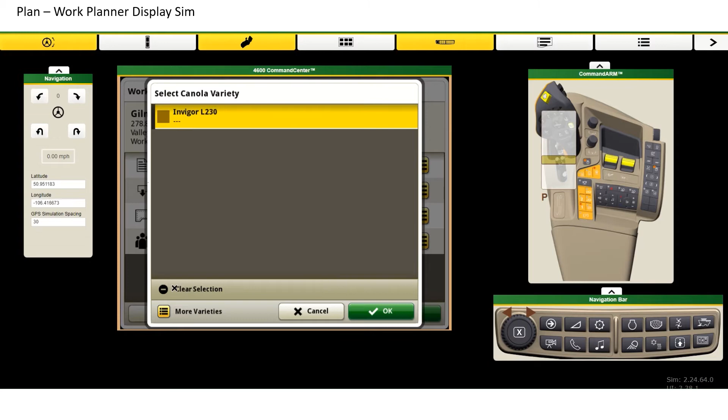If something changes before the day that you are actually going to be harvesting or planning any other operations, you can also edit these as you're entering the field. So let's say you run out of a certain variety and you want to change it to another variety that you'll be using on that day. Here you can select that, clear that selection, and select another variety instead. Here we have 233P as one of our other options. You can add another variety from scratch too if you'd like to enter it into the display like you normally would.

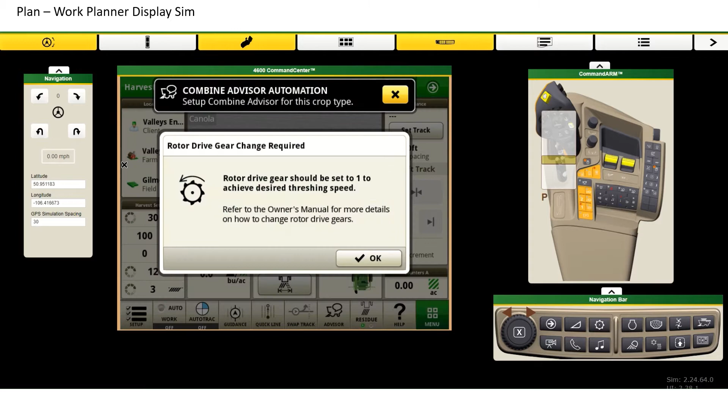You can also add in your operator name here from your list of operators or add a new operator as well. Once you start harvesting and hit OK, this is going to change your client, farm, and field here to that information that you'd saved previously. This will show up again as you exit and enter the field, and it will resume your work as well automatically. It'll give you the option if you'd like to start new work, you can do that as well.

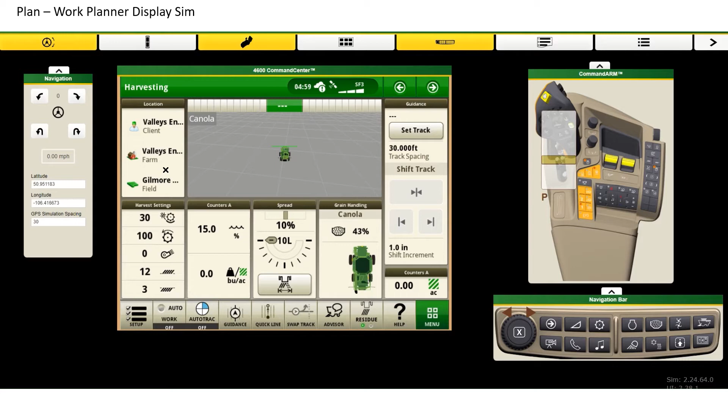The next tab that we're going to go over is the Analyze tab. In this tab, you're going to be able to analyze and report on your completed work across multiple fields through your Analyze tab itself. Through Field Analyzer, you're going to be looking at your completed work, as well as Field Analyzer Beta, which is the newest version. What we'll go through is going to analyze your field side by side and the yields on your field too.

Machine Analyzer is going to analyze your equipment across your fleet, as well as Machine Reports can generate reports based off of your fuel utilization and maintenance. We're going to go into Field Analyzer here first.

When we get into our Analyze tab here, you can see that there is Field Analyzer and there's Field Analyzer Beta. The difference between these two is Field Analyzer is our original analysis tool to look at your field's yields as well as other components and compare them across the field. Field Analyzer Beta is our newest version of this tool. The only reason that we have the beta version on there is because we are continuously adding new features and working on this model to make it better every day.

I'm going to start with Field Analyzer itself here and just give you an overview of what the Field Analyzer tool looks like. When you select the tool, you're going to have the option at the top here to select your field. Here, I'm going to select the field that I'm looking for, and then it's going to show your most recent application that's been done on that field. In this case, it was an application. I'm going to select our wheat durum harvest from 2020 to give you guys an example.

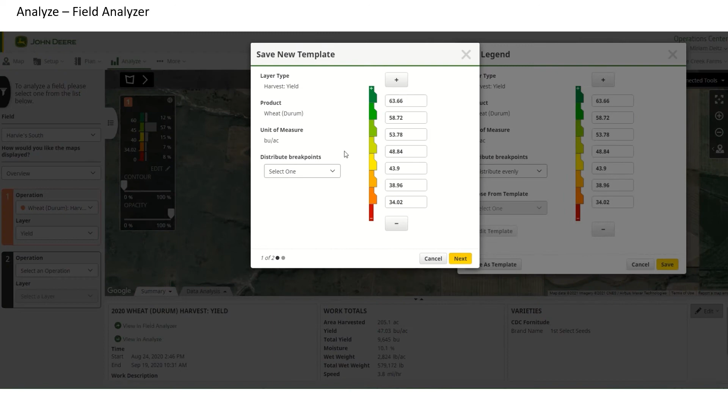So if you have multiple fields, let's say you have two different fields that you have durum on, and you want to use the same legend to put them side by side and compare their yields, you can save that legend as a template, select the breakpoints of it, hit next, name this, hit save, and that's going to be a template that you can choose from. Now it's in this drop-down list so that when you go to select it next time, it's going to be very easy to do. So when I hit save here, it's going to readjust the legend that's being used on this map.

Once this legend is saved, it's going to adjust that map accordingly to the colors that are on that map as well. You can see that we're going to be seeing that same area in the center of the field that's showing the variation in yield. However, with the Field Analyzer Beta option, we can break it down into a specific area and analyze just that. You'll notice that instead of on the left side, where the agronomic data was listed before, it's actually shown below here, where we can see the dates as well as your work totals and your varieties below.

When I select a specific area of the field, let's say this strip right here where we're noticing a lower yield, it's going to isolate that and just look at that data. This is going to load down below and showcase exactly what you're seeing in this area in a comparison to the overall field totals too. So we can see here that when we have our selected versus our full operation, we can compare a side-by-side of what that yield looked like compared to our total bushels per acre.

In this area, compared to our average bushels an acre, it's only 1 bushel an acre lower than the average, although this average does include these edges around sloughs as well. We can see that the moisture was about 0.4% higher, and our wet weight was a little bit lower as well. If we want to remember this and see this total, so we have our 46 bushels an acre, we can compare it without looking at these areas that we had in sloughs as well, if we want to just move this selected area over to another region of the field.

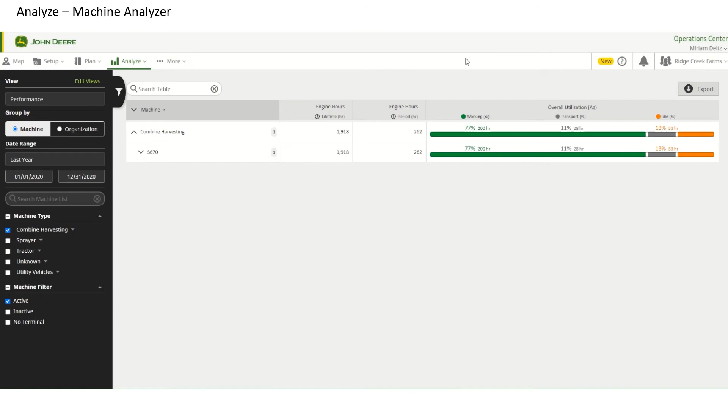So I'm going to start with a bit of a Combine Advisor package overview here. There are kind of three portions that come with our Combine Advisor package. There is our set portion, as well as our optimize portion and our automate, which is the primary part of the package. So with set, that is where you set your harvest setup. With optimize, that's where you're going to be looking at VisionTrack and optimizing your performance. And through automation is where you're going to be looking at Harvest Smart, Active Terrain Adjustment, Active Vision cameras, as well as your Auto Maintain.

When we look a little bit about the journey and the history here of where harvest automation has come from, we can start by looking at 2003 here, where we had our combine adjustment guides, where you'd walk through and it'd have recommended settings for different conditions. Then in 2013, the GoHarvest app was introduced as our digital interactive app that would recommend adjustments as well. That was for setting your combine manually.

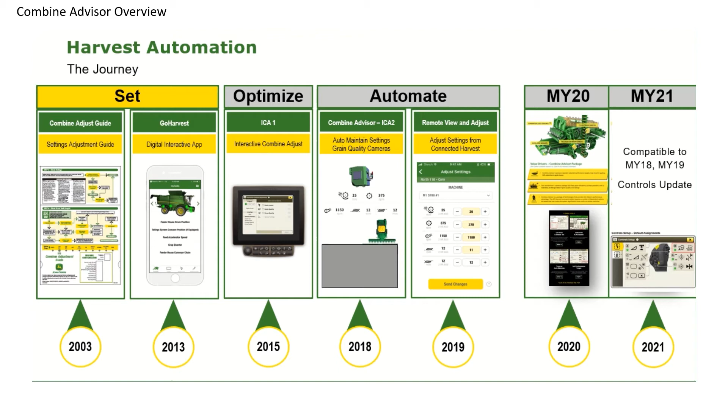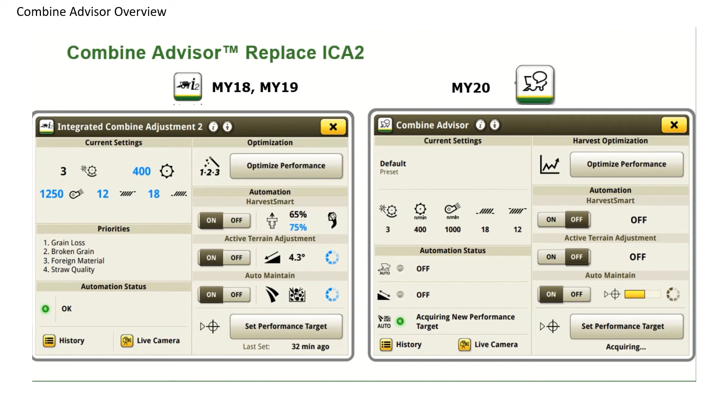There are a couple other things that have been changed. These priorities have changed now through our optimized performance function, and that's something I'm going to show you next. So when we select optimized performance, previously you'd see these areas to improve. That would be your grain losses, your grain quality, your straw quality, and excess tailings. You were able to set these as a priority, which one you'd like to set as your highest priority, and so on.

The challenge with this is that it would only consider between these two priorities, and then there could be some conflicting priorities in between the rest. So as you were looking at grain loss, your second priority would be broken grain, but as your conditions change, that wouldn't vary as much and you'd have to select your new tabs.

This optimized performance function now allows you to go into these individual performance issues. So separator losses, shoe losses, unthreshed losses, as well as broken grain, light material and foreign material, unthreshed material, straw quality, and excess tailings. As you select one of these, it's going to give you the options of mild, medium, or of a moderate issue, and you're going to be able to choose what you'd see this issue as. Then it will give you recommended solutions on the right side.

The other large change that we saw from previous years to our model year 20 is the Harvest Smart logic. So this logic changed from being a target pressure to now an engine power target. You can see that here on the previous model year 18 and 19 settings, you have your target pressure from a min to a max, and you're going to that to set where you'd like your rotor pressure to be. Here on the right side is what our new format looks like. This is a percentage of your engine power instead.

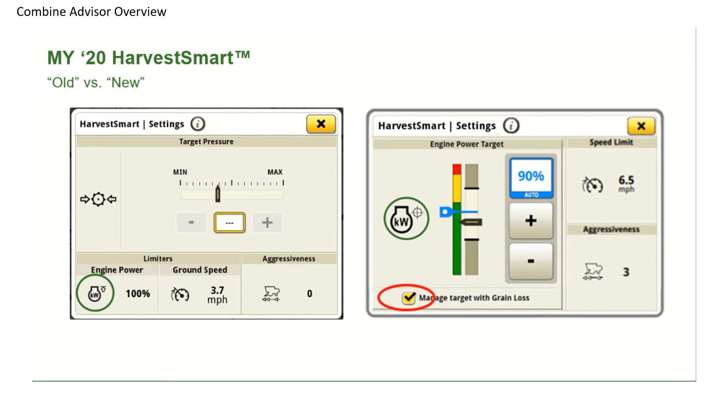Your aggressiveness and your speed limit are going to be the same, but the largest issue is that you're no longer looking at that target of your rotor pressure, but rather your engine power target. What this is going to do with the rotor pressure is show that with that rotor pressure, you're reacting as it actively comes into the combine.

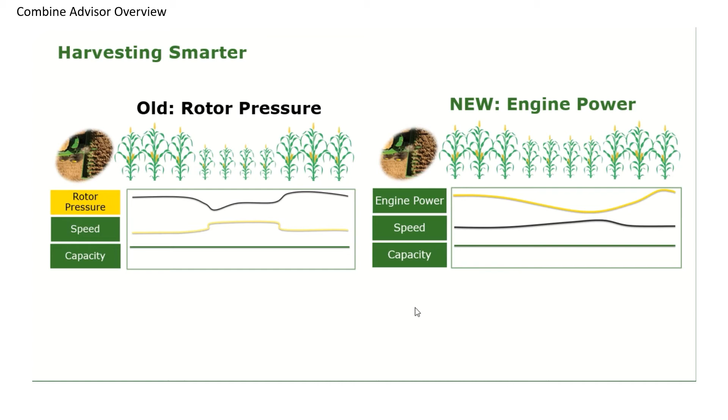You're looking to be a little bit more forward-looking as your crop conditions change. So as your engine power starts to decrease, your speed is going to increase. Whereas with rotor pressure, you'd see a sudden decrease in your rotor pressure, and then your speed would jump up. It is a lot more of a gradual increase, and this logic has improved over the last year.

Something important to note with all of this is that in model year 21, as of January this year, this Combine Advisor package, this new update, has been made compatible with your model year 18 and model year 19 S700 machines. So if you do have an S700 and you previously were running ICA or ICA2, you're going to be able to update your model year 18 and 19 machine to this new version of the software package.

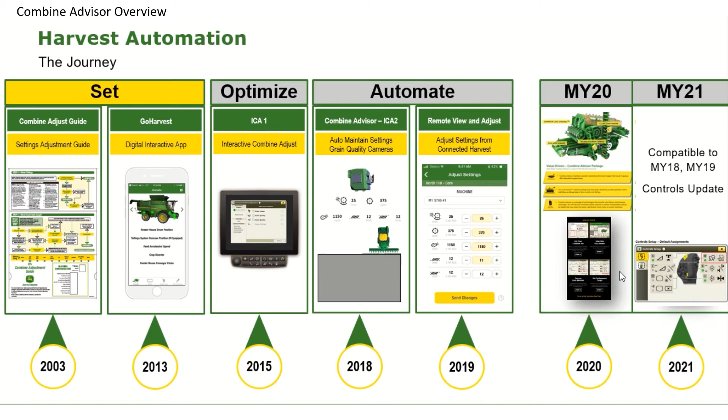Next, we want to set our performance target. You want to make sure that when you set your performance target, you're in a very homogeneous part of your field. So you want to make sure that it's good standing crop and it's a good sample to be setting your target to.

If you're setting it in an area that is a poor sample, if you have lodged crop or poor crop in the area and you're going to be slowing down or speeding up, then that target's going to be an inaccurate target that's used for the rest of that field and for the rest of that day. So make sure that when you are setting that performance target, you've been harvesting for a couple minutes already and you're in a good part of the field to use as your target for the rest of your settings. Then after you do get that performance target and your auto maintain set, that is when you can start your Harvest Smart and your Active Terrain Adjustment as well.

We're going to go through our Combine Advisor systems today and how they all work together. First, we are going to start off with optimizing performance. This is going to help optimize the combine and get your settings set properly before we get into our other automation systems that are available, including Auto Maintain, Harvest Smart, and Active Terrain Adjustment.

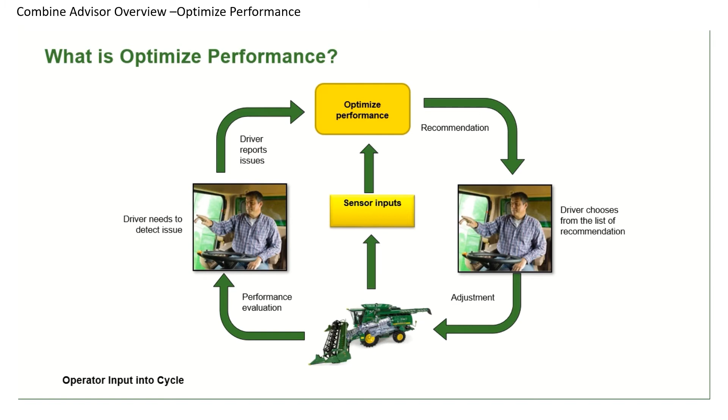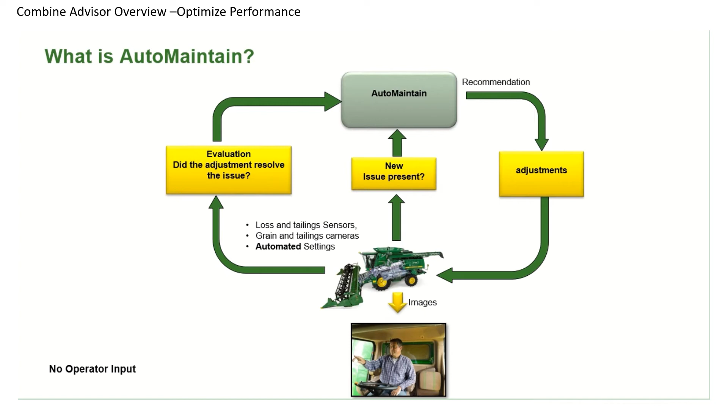Then that goes back into your auto maintain where another recommendation is made. Through all of this process, there is no operator input other than viewing those images as they're coming into the machine and reviewing the adjustments that have been made by the machine automatically. That is where Auto Maintain compares to our Optimized Performance tab.

Here we're going to go into our Optimized Performance. You can see on the left side, the list of performance issues are going to be ranging from separator losses, shoe losses, down to your straw quality and your excess tailings. Let's select one of these to report it as an issue. For example, heavy foreign material that you can notice on your cameras. When you see that heavy foreign material, let's say you're going to select it as a moderate issue.

Here, your current settings are listed above and your recommended settings are shown below. In this case, it wants to recommend decreasing your sieve. If you select the options here on these arrows, you're going to have other options that could also potentially remove your heavy foreign material and reduce that in your sample. If you are going to apply this, all you have to do is select apply and it will change these current settings to include this setting now. If you don't want to apply it, you can simply select stop and it won't make that change.

Let's try one for broken grain. Let's say we have moderate broken grain in our tank and it's recommending that we increase our threshing clearance. If I hit apply, it's going to apply the solution and tell you to wait as it's applying. The adjustment is complete, and then you'll notice that our number has gone up to 13 here.

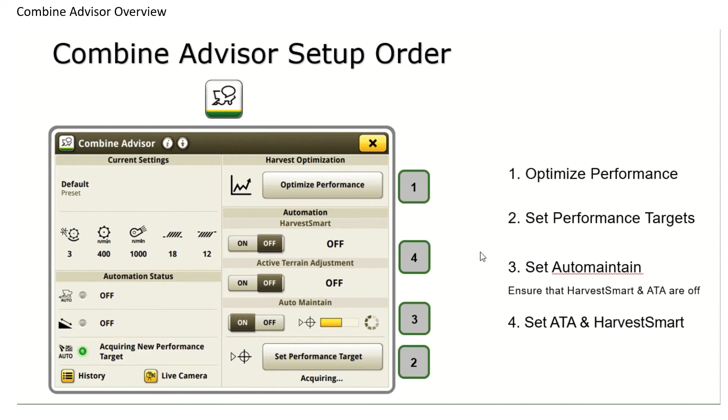Once we have optimized the performance of our machine, we're going to take a look at setting our performance target and our auto maintain. When we select our set performance target, we're going to see this acquire new performance target notification come up. It notifies us that our existing targets are going to be updated and allows us to select OK to set that new target. When we select OK, it's going to show this acquiring below.

A couple of things to note with setting your target is that when you press it, you want to press it when you're satisfied with your combine's performance. So make sure that you're setting it accordingly to what you've optimized already, like we walked through. When your conditions are changing throughout the day, you can adjust the settings without changing that performance target as well. But if a bad target is set, like I said, in uneven crop, or if a machine is not optimized to its expectation, your auto maintain is going to maintain a bad target.

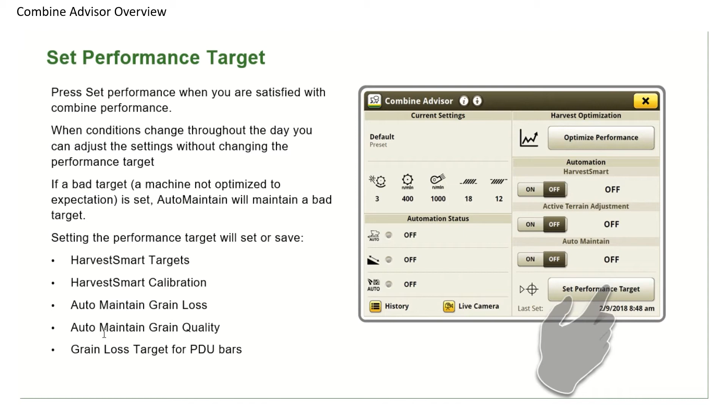Some of the settings that performance target is going to set and save are your Harvest Smart targets, your Harvest Smart calibration, your auto maintain grain loss, as well as your auto maintain grain quality, and your grain loss target on your PDU bars. Your targets can be saved for up to 5 of them, one for each of the supported crop types, and your target expires after 30 days.

The operator is going to get a warning when your targets are older than 12 days, so setting the performance target is going to define the level of all of the parameters that auto maintain is taking into account. That is why this is important. So setting that target is going to calibrate your sensors, set your Harvest Smart targets, and define your auto maintain targets as well.

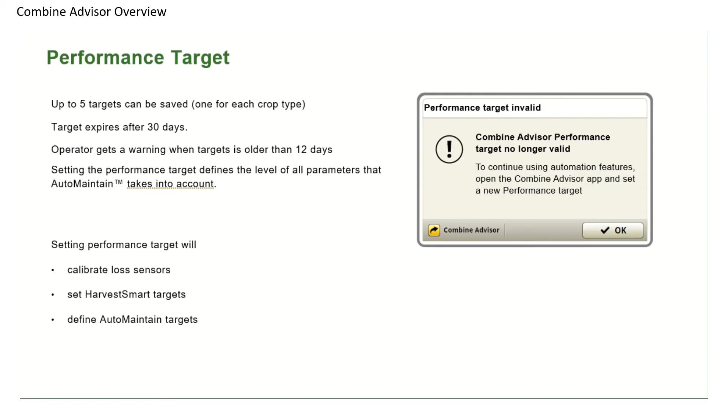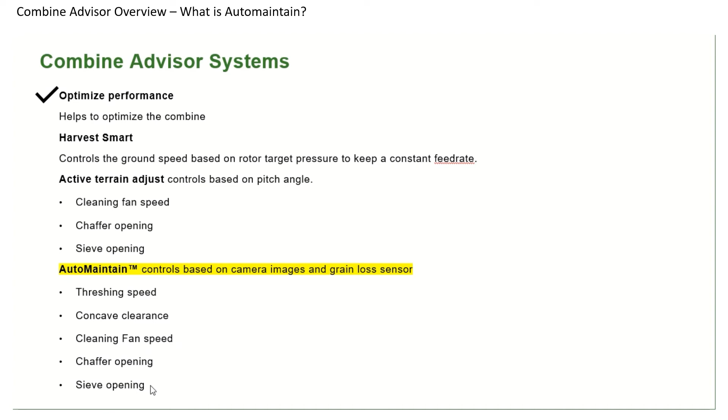We've already gone through our optimizing performance here, and now we're going to go through auto maintain. So what auto maintain does is it's going to control, based on your camera images and your grain loss sensors, the following things: your threshing speed, your concave clearance, your cleaning fan speed, your chaffer opening, and your sieve opening. Next, we're going to go into our details on auto maintain.

First, though, I want to mention a few things about auto maintain that are important, including creating a custom preset for your best performance. Because auto maintain optimizes based on a default preset, you want to make sure that you do set a preset yourself for the best auto maintain performance. How you can create that preset is going into your harvest settings and entering the setting that best fits your region. Here, you're going to set your threshing speed, your clearance, your cleaning fan, your chaffer clearance, and your sieve clearance, as well as your loss monitor performance target.

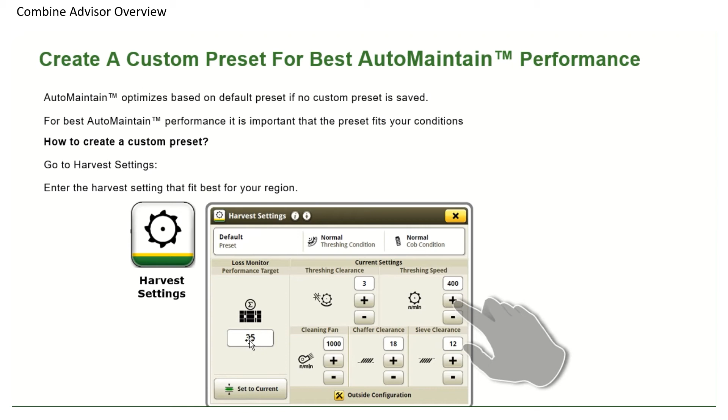Then you can press the bar in the top of that harvest settings page and click on Save Preset. That is going to be down below. You can save the name of your preset as well as your threshing conditions and your straw conditions that you're going to be in. It will give you a preview of your settings, and you will be able to easily access these later.

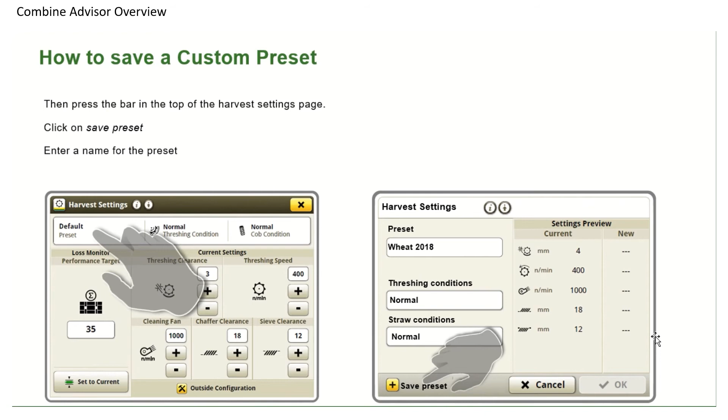When you're in your Combine Advisor run page and you select next to your Auto Maintain, it's going to bring up your Auto Maintain settings. Here, you're going to see your response aggressiveness as well as your issue sensitivity. Response aggressiveness is the response time and how much time it takes to trigger a reaction after a problem is detected. Your issue sensitivity is how severe that problem needs to be in order to trigger a reaction. This is going to help you adjust accordingly to your conditions and to how sensitive you want this automatic system to be.

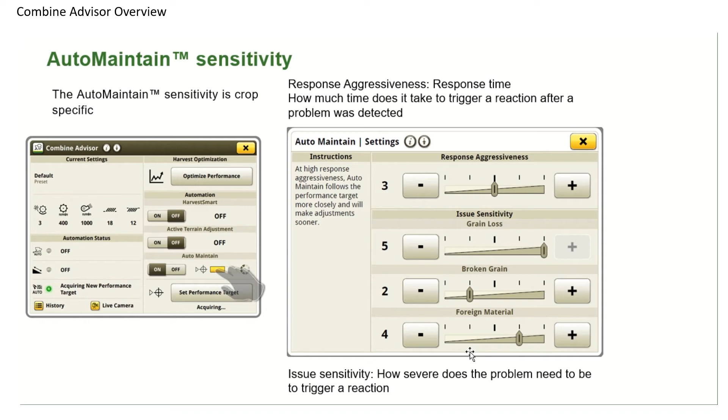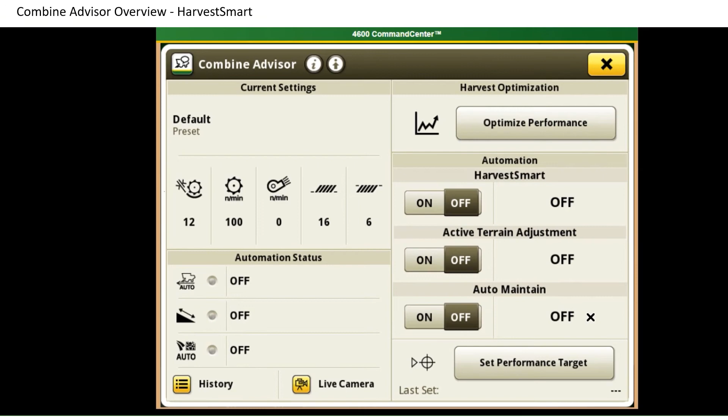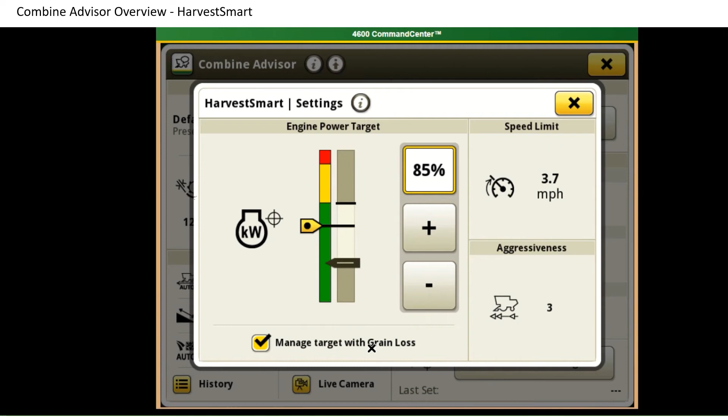Now that we've gone through optimizing our performance as well as Auto Maintain, we're going to go into Harvest Smart, which is going to control your ground speed based on your rotor target pressure and keep a constant feed rate. So from our Harvest Smart main page, when you select beside your Harvest Smart toggle button, you're going to see your main settings. Here is where this engine power target that I mentioned before is going to be shown, as well as your speed limit, your aggressiveness, and then your ability to manage with your grain loss. I'm going to go into a little bit more detail on each of these and showcase what these settings should look like.

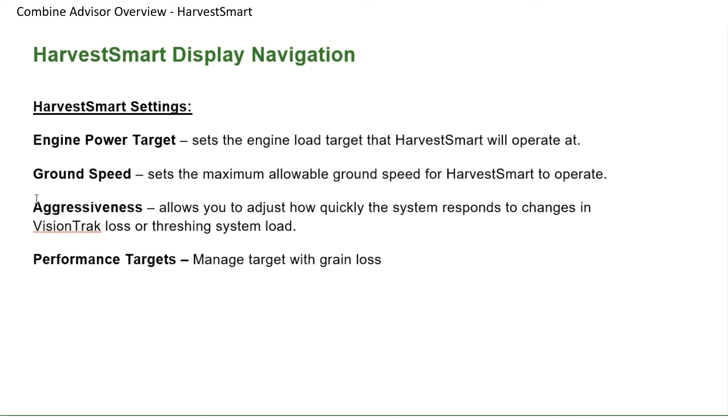So when we look at our Harvest Smart display navigation, I mentioned that engine power target, that ground speed, that aggressiveness, and those performance targets. What your engine power target is going to do is set that engine load target that Harvest Smart is going to ideally operate at. Your ground speed is going to set that maximum allowable ground speed for Harvest Smart to operate at in ideal conditions. Aggressiveness is going to allow you to adjust how quickly that system is going to respond to your changes in your VisionTrak loss or your threshing system load. Your performance targets are going to manage your target with your grain loss as well, which I'll go into more detail on. So first off, I want to showcase this engine power target.

Here, you're going to see it's set at 90%. So I wanted to recommend that in consistent conditions, we want to be setting that engine power target to about 80 to 90% ideally. If you're in changing or high biomass conditions, you want to be a little bit lower at 75 to 85%. And in your tough feeding conditions or down crop, probably about 70 to 80% is where you want that engine power target to be. If you are running a draper header, you can run about 5% higher on any of those recommendations due to better feeding.

But an engine power target above 95% is not going to be recommended. If that target is set too high and in difficult conditions, the machine will overreact, or if it's set too low, you will not reach the max capacity. So it's important to hit that perfect range in order to get your maximum performance out of your Harvest Smart. With these recommendations, it's also good to note that if you have a skilled operator in these tougher conditions, you're going to be able to operate in these tougher conditions, perhaps at a higher engine power target too.

Next, we'll see our ground speed. This is selected on the right side of this menu here. With your ground speed, you want to set your max speed to about 1.5 to 2 miles an hour over what you think your expected average speed is going to be harvesting in field. If you'd like to harvest at about 4.5 to 5 miles an hour, you want to set your max speed to 6.5 miles an hour.

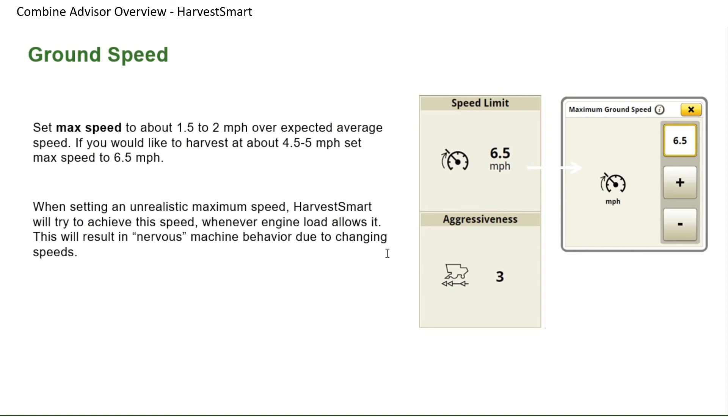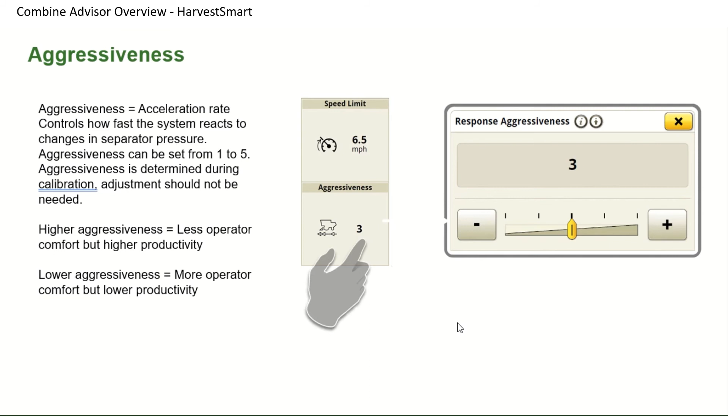Underneath of that is your aggressiveness setting. Similar to what we saw in our Auto Maintain settings, your response aggressiveness is going to be set on a scale of 1 to 5. This is going to be determined during your calibration, and your adjustment to this shouldn't be needed. Essentially, a higher aggressiveness is going to equal less operator comfort, but higher productivity, and a lower aggressiveness is going to equal more operator comfort, but lower productivity. Essentially, this acceleration rate is controlling how fast that system is reacting to your changes in that pressure, as well as that engine power target.

The last thing to note with Harvest Smart settings is you're managing your target with grain loss. So when Harvest Smart is operated with this target checked, your engine load target is going to be updated if your grain loss target is not achieved. So consistently high losses will make lower power targets, and consistently low losses will make higher power targets.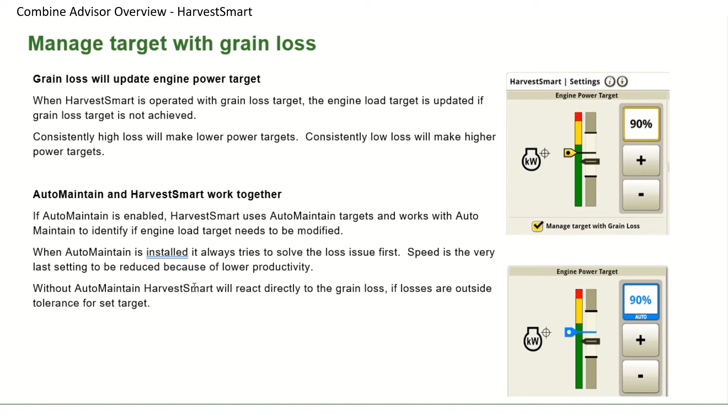Auto Maintain and Harvest Smart also are working together. If Auto Maintain is enabled, Harvest Smart's going to use your Auto Maintain targets and work with your Auto Maintain to identify if your engine load target needs to be modified. When Auto Maintain is installed, it always tries to solve the loss issue first. Speed is the very last setting to be reduced because of your lower productivity. Without Auto Maintain, Harvest Smart will react directly to the grain loss, so if losses are outside that tolerance.

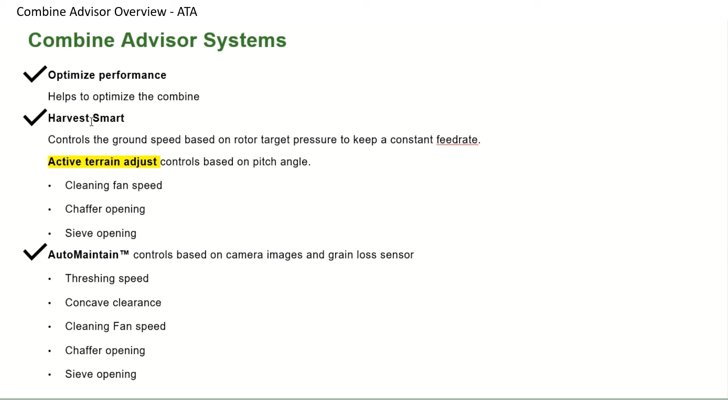Now that we've gone through our Combine Advisor systems for optimizing performance, Auto Maintain, and Harvest Smart, we're going to touch on Active Terrain Adjustment. Active Terrain Adjustment is a system that's going to enhance your grain quality and reduce your grain losses when you're harvesting on hills. This feature is going to automatically adjust the combine's sieve and chaffer openings and carefully control the cleaning fan speed, as well as stabilizing your tailings levels and ensuring a clean grain tank sample. You can see here your uphill and downhill sensitivity are going to be adjusted on a scale of 1 to 9.

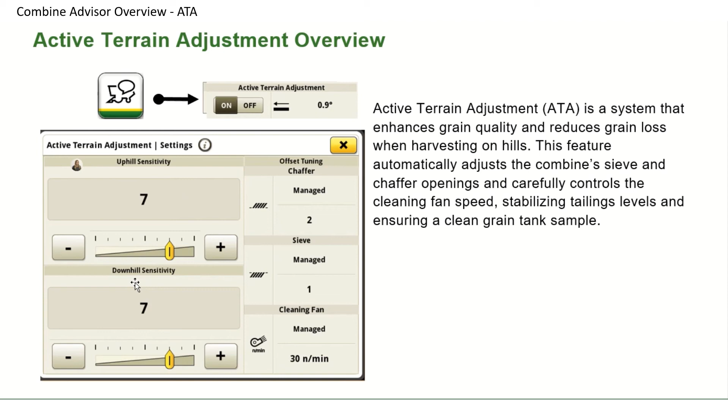When you're adjusting the sensitivities, your uphill sensitivity is going to accelerate or decelerate your system's reaction to your vehicle pitch when you're harvesting uphill. That's going to help reduce your grain loss and tailings. Downhill sensitivity is going to accelerate or decelerate the system's reaction to the vehicle pitch when you're harvesting downhill, which is going to help maintain your harvested grain cleanliness as well.

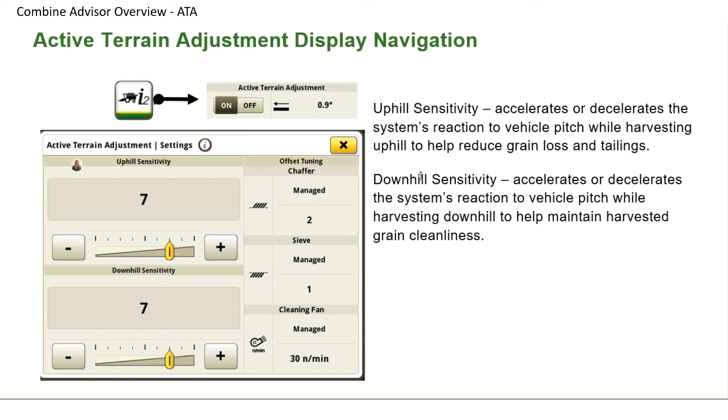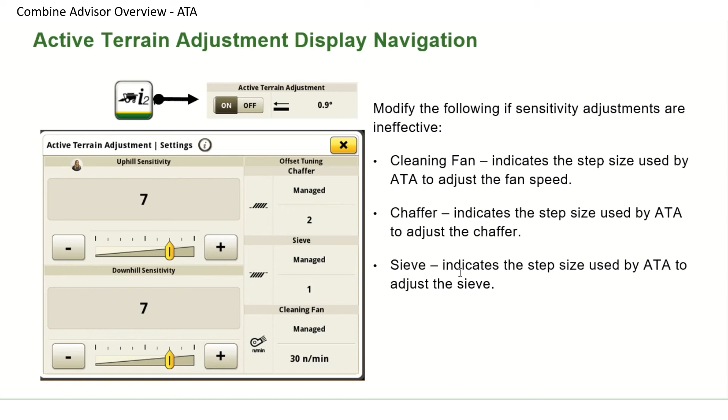On the right side, you're going to see your chaffer, sieve, and cleaning fan options too. The cleaning fan is going to indicate the step size used for Active Terrain Adjustment, adjusting that fan speed. As well, you're going to be able to indicate the step size for the chaffer and the step size for the sieve. If we take a look here and click on one of these examples, you're going to see as you select, it's going to let you include this in your automation. If you want to uncheck that, you can exclude your chaffer from your automation if you wish. Here is the set of adjustments that are going to be made automatically. Similarly, you can do this with your sieve and your cleaning fan.

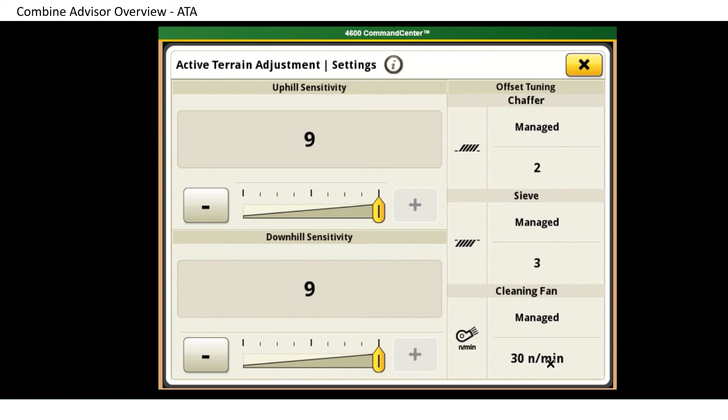Overall, you should now be able to understand how these 4 Combine Advisor systems work together. Through optimizing your performance and setting your combine properly, through Auto Maintain to control your threshing speed, concave clearance, cleaning fan speed, chaffer opening, and sieve opening based on the camera images and grain loss sensor, through your Harvest Smart that's going to control your ground speed based on your rotor target pressure and keep you at a constant feed

rate, or your Active Terrain Adjustment that's going to control based on your pitch angle, your cleaning fan speed, chaffer openings, and sieve openings. All in all, our Combine Advisor system works together to automate and make your life easier as you're harvesting in season.

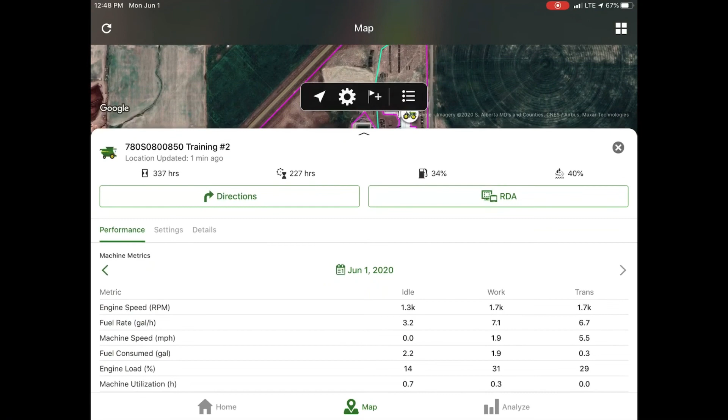In this video, we will be looking at the Settings tab as it relates to a feature called Remote View and Adjust. Remote View and Adjust is a feature that allows users the ability to view and adjust an S700 combine setting directly from a mobile device. The 5 combine settings are streamed directly from the Gen 4 4600 command center. The 5 combine settings that are displayed in the My Operations app are concave clearance, threshing speed, cleaning fan speed, chaffer clearance, and sieve clearance.

Requirements for Remote View and Adjust include an S700 series combine, JDLink, premium activation, and the newest software. Also, make sure to update your My Operations app to the latest version. Click on Adjust Settings. Now you can either decrease, or in this case, increase one or any of the 5 settings. Send adjustments and then wait for the operator in the cab to accept the recommendation. Once accepted, the adjustment will be applied to the combine, and then the app will update to show that the adjustment has been completed.

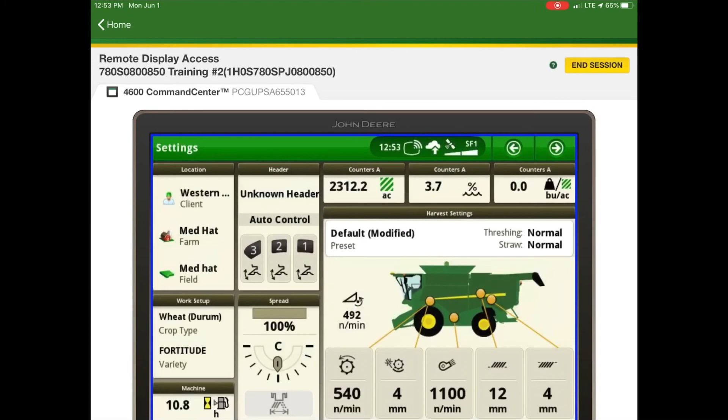Let's go inside the cab and see what Remote View and Adjust looks like for the machine operator. We will be using another feature in the app called RDA, Remote Display Access. Remote Display Access allows the My Operations app user to view the in-cab display on their mobile device in real time. Here we see the Gen 4 4600 display and the 5 combine settings we are attempting to adjust.

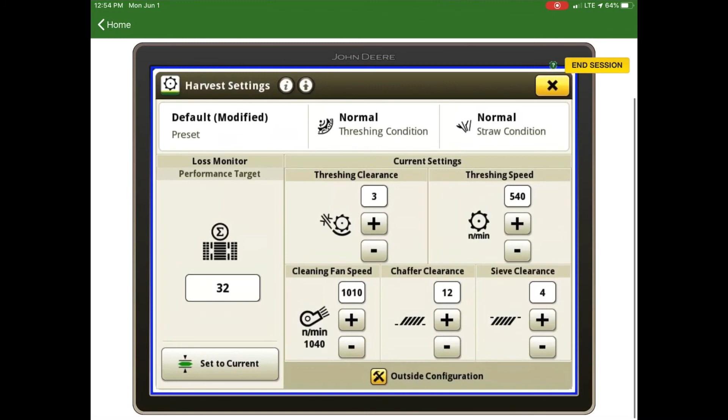Once the My Operations app user sends the request to the machine, a message will overlay on the display run page requesting that setting changes are recommended. The operator in the cab will need to confirm these changes on the Gen 4 display before the adjustment can be made. Once accepted, the machine will start to adjust the settings. Let's take another look at the operator accepting the recommendations and then the machine making the changes.

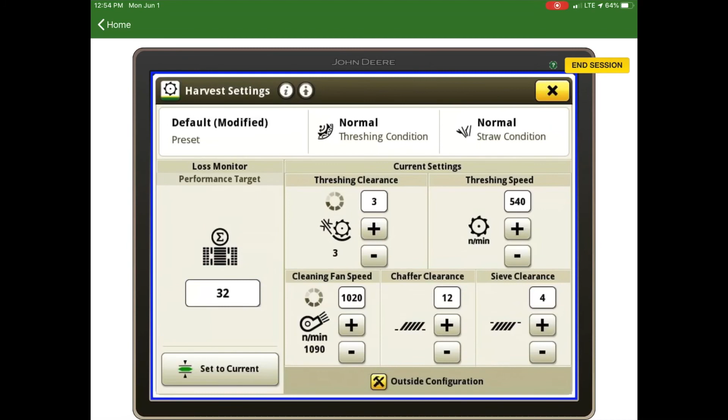The other option for the operator is to reject or decline the recommendations. Once declined, the remote display overlay will disappear and no changes are made.

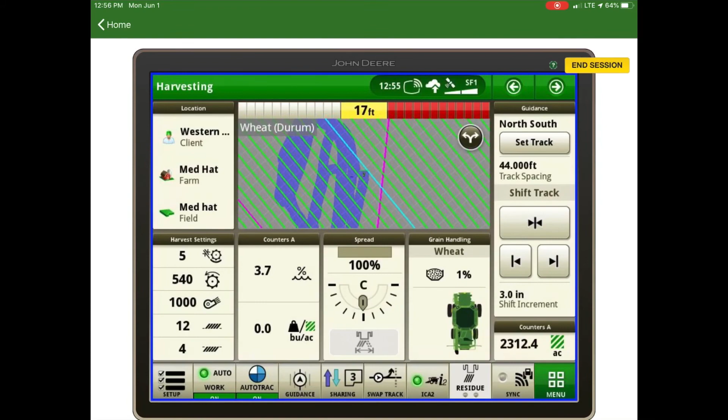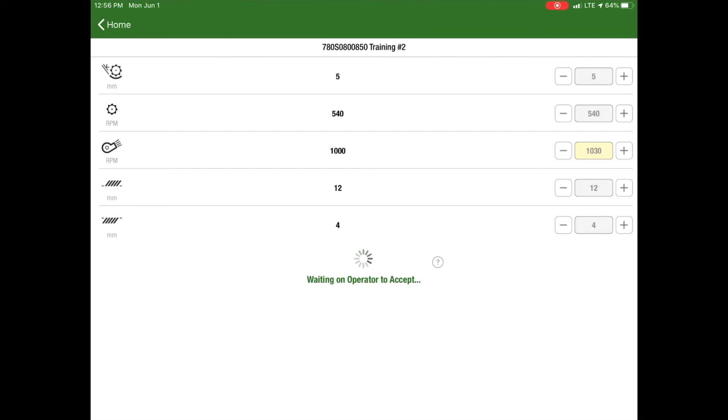Let's go back to the My Operations app and see what it looks like when the operator in the cab declines the recommended remote adjustments. Here, the app user attempts to adjust the settings. The request is sent to the combine. The request overlay will now be displayed in the cab, and the operator declines the adjustment. Here we get the notification that the adjustment failed because the operator rejected the adjustment request. Because the request was unsuccessful, a red X appears on the app adjustment screen.

Let's review. The combine is in the harvesting state, operator is in the seat and the machine moving forward with the feeder house lowered and the header and separator engaged. The My Operations app user sends a remote view and adjust request to the machine. We wait for the operator to accept the remote request, and then once successful, a green check mark will appear on the adjustment screen.

In this video, Caleb will explain to us how to change layers in a Gen 4 display. In this video, we're going to be talking about how to change map layers that you're looking at from blue coverage to different layers available on the Gen 4 display. So the first place you're going to need to go is on your home page. You just need to click on one of the map icons.

If you don't have a map icon on your home page for guidance, you can go into menu, go into applications on the left hand side, and then scroll down until you find mapping. In mapping, it'll bring up this smaller window. You can click on that, and this is the window you'll be in. So in the bottom left hand side, you'll have these 3 dots and lines. You'll click on this button. This allows you to see what the legend for that map is.

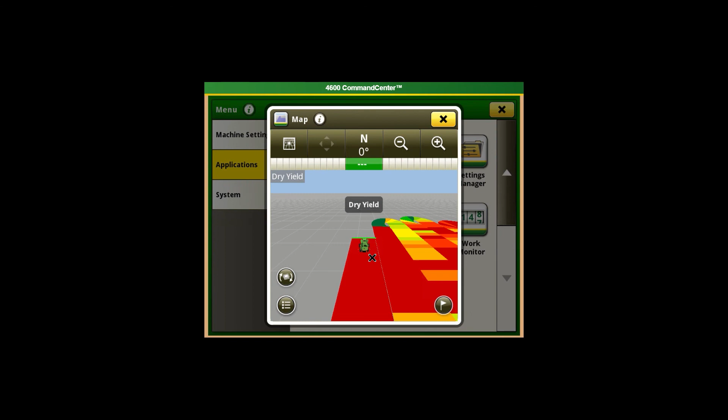The other option, instead of just looking at a blue map to see where people have been, is you can click on these white boxes right here, go into this menu, and pick a different layer to view instead of coverage. So coverage is just blue. You could also view moisture or dry yield layers. We can click on dry yield, go back to our home page, and now when we view the entire map and zoom out, we can see our entire yield instead, and how it yielded.

But we notice that there's a lot of red streaks in the field. So we'll want to go back into that menu button in the bottom left and change our legend. We know that we had some spots that went down low enough that we want this to be 10 bushels and this to be 110 bushels. We can change these numbers to anything we want according to what crop we're in. If you're in a lower yielding crop, you could have it at 0 to 40 bushels, or a higher yielding crop like corn, you could start at 100 and go to 200. We can click OK, and now our map gives us a better representation of what the yield was throughout that field.

The other option is you also get to see in a Gen 4 the yield from other machines being shared in the same field as well. Their yield will show up on your display, which allows you to see if they have a different setting on their combine, what they're yielding, or if they might have forgotten to change settings from a different crop type. If their yield is much lower because they haven't switched crops, it might be a way for you to look at the job they're doing while they're doing it.

The other option with these layers is if you wanted to just cycle through the layers, there's this button above the other button. You can click on this and it'll cycle between coverage, moisture, and dry yield. This allows us to cycle through all the different layers. Our moisture map is quite off, so we're going to put the bottom at 1%, and the top is going to be at 12%.

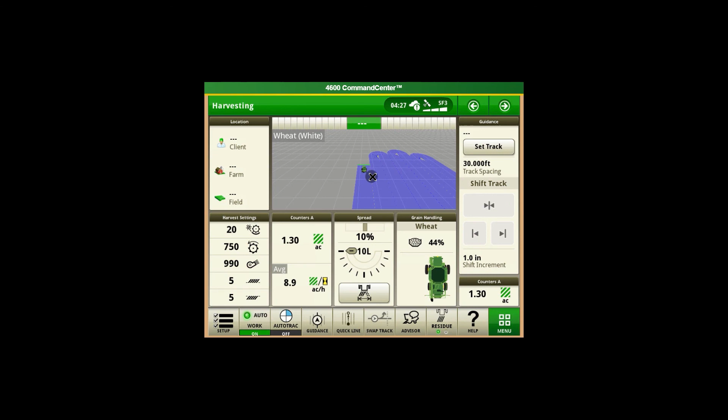The other point to note is on this, we can scroll through and go to our dry yield. When you start combining, the map behind you will be gray because it has to load the combining info; it takes a second for it to load the map. So here you can see it's starting to fill in color behind us. So you need to wait while you're combining to be able to view the different colors.

It does only change whenever it sees a change in yield for a long enough period of time to justify it showing a different color, so it won't immediately blip just because there's a small point. It does lag behind the combine. So if you have the view zoomed in too much, you might not be able to see what your yield is unless you go to a whole map picture.

So if you're zoomed in too much on your combine, you won't be able to see the changes in the yield behind you unless you go in the top left-hand side to an entire view of the boundaried field. You'll be able to see the whole field and the yield as you go.

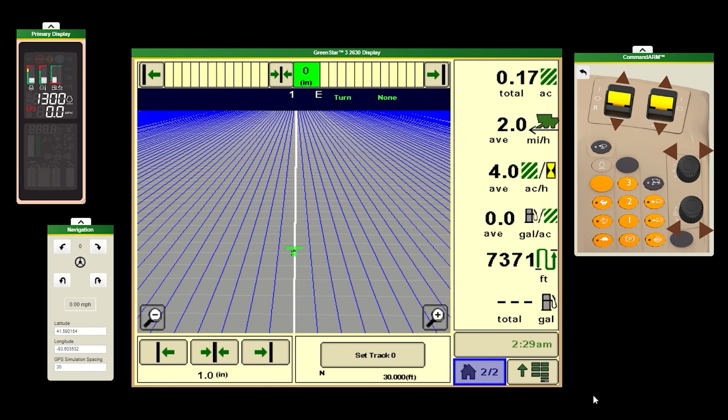In this video, Joe will show us how to view other map layers on a 2630 display. All you need to do is go to your setup, your GS3, mapping, map settings, and as you see, it's showing coverage only, which is default. You can change that to either flags, moisture, or yield. So in this case, we're going to change it to yield. Hit accept, and here we have our settings.

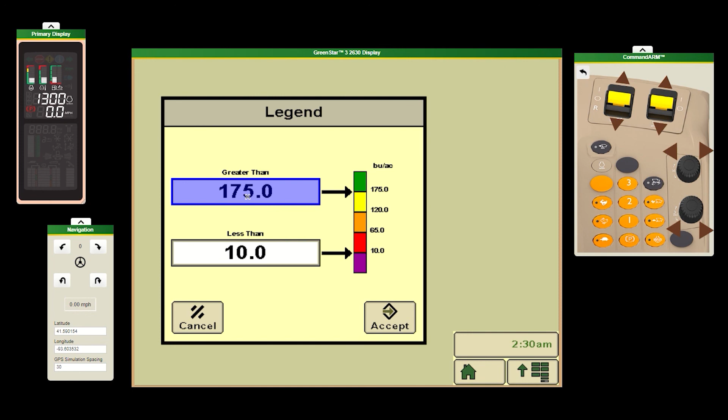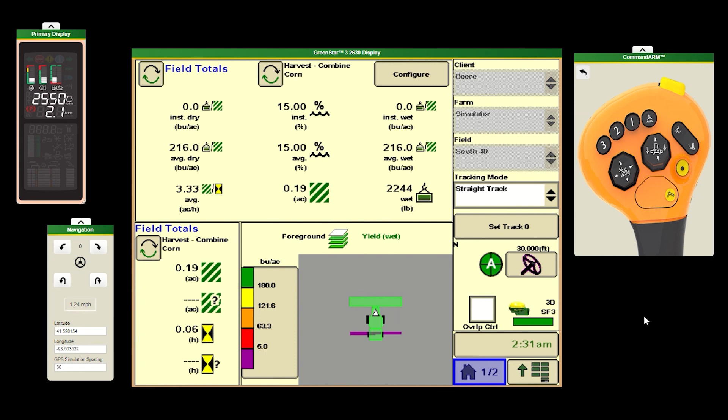And now we are showing yield instead of coverage. We'll speed up a little bit. It's obviously showing low yield, so like I was saying before, it's reading 0 here, your instant yield, and that's the reason it's showing purple. It really should be what the simulator is reading. It should be reading green here. But it's a quick and easy way to switch it. We can switch it back at any time, toggle it back and forth, whatever we want to see.

In this video, Joe will explain how and when to use overlap control in a 2630 display. I want to talk a little bit about overlap control on a 2630 display. Where overlap control is beneficial is when you're finishing up a field and you only have half a header width left to combine. Without overlap control, your yield will show very low due to a narrow cut. Overlap control will compensate for this. Keep in mind, if you have multiple combines in the same field, it only works if you have data sharing or machine sync. Let's see how we can set this up.

We go to setup, and then we go to GS3, equipment, header, and here's your overlap control checkbox. We check it off. Go back to the home page. Now we can start combining. We engage the separator and the header.

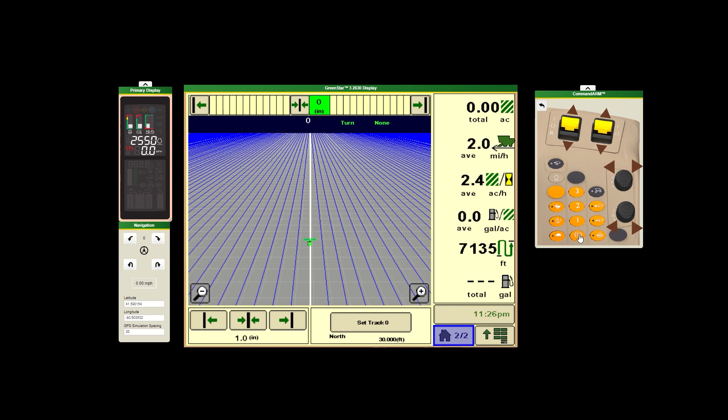Go to high idle. Take the park brake off, or it's not going to move. We start moving. Turn the auto steer on. And hit our resume switch. And away we go. We're going to turn around and we're going to overlap a bit of what we cut now. So instead of cutting 12 rows, we'll maybe go down to a few less. How many is hard to say. Depends how it works out.

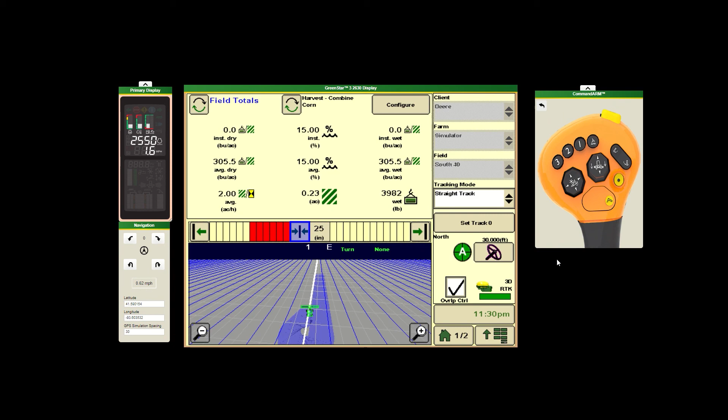So we're going to slow down a little bit. Turn around. And then we're going to turn. So here we're overlapping pretty good. We'll center the line here and resume. Hit resume on the auto steer. And I'm going to probably speed up a little bit now.

Better speed up a little more, there's rain coming.

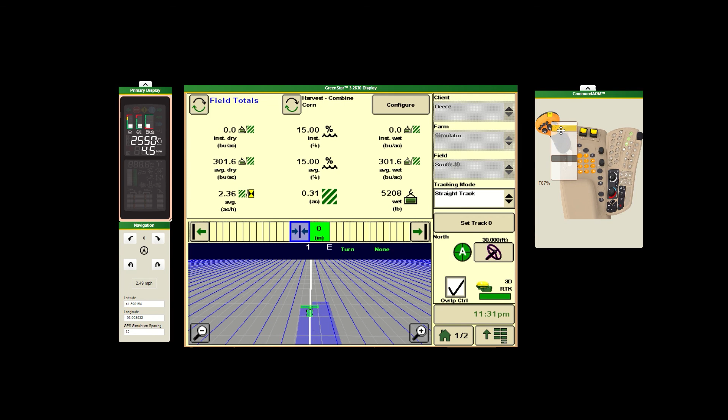So now it doesn't show you exactly, but like I say, there's no instant dry or wet yield, but it is the accurate data that's coming in now, whereas without overlap control, it would show really low yield on this last pass. So we'll shut things down, and that's the end of this video.